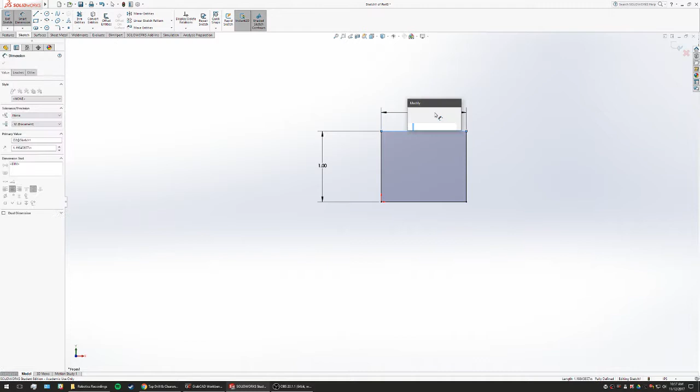click on the edge you want to dimension, click somewhere else, and then I want to do a 1-inch cube. Alright, and then now I've dimensioned one side. I'm going to go back to the features. I want to extrude the base. And then this number right here is how deep it extends.

And so I want to extend it 1 inch, and I just want to go blind, and I want to go off of the sketch plane that I started on. And then you have a 1-inch cube. Then you can type in cube, save it as that. I already have one, already made this. Alright, now let's make a cube.

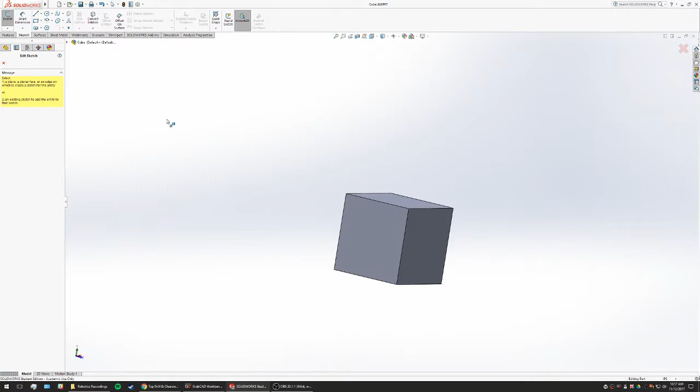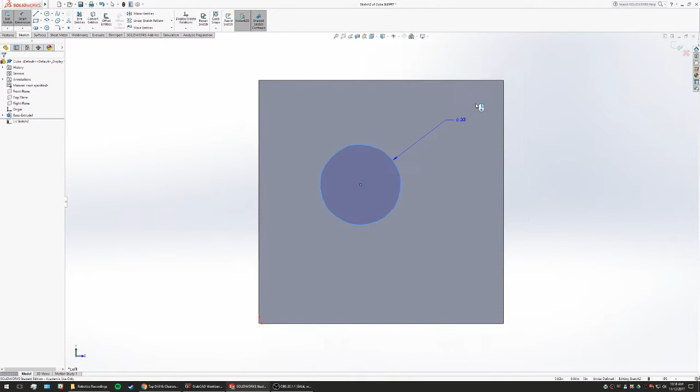If you want to keep going, you can click sketch, you can click on a face, and so now I can draw a hole or something, and I draw on that face. And if I want to view that face head on, hold Control, tap the number 8, and it'll reference to that face and give you a nice view. And I want to dimension that hole. Let's make it a 1/4 inch hole, so 0.25.

You can also do math. Whoops. You can do 1 divided by 4, and then it'll automatically solve it for you. Now there's a few ways you could dimension this to the center of this cube. So the first way is click the center of the cube, the center point, and an edge. And if you want to put it in the very middle, you go 0.5 and 0.5 that way. Now it's in the very middle.

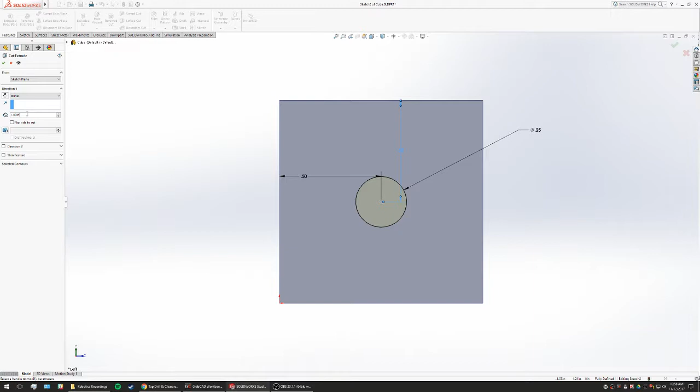And you can do extruded cut under the features tab. And then there's a whole bunch of options. So blind, you set the distance you want it to extrude. And so it is default to 1, so it'll go all the way through. What I'd prefer to do is through all.

And through all just goes to the next side. You could do up to next, and up to next will stop there. So if you have more material over here, it'll stop at that point. We're just going to go through all. And then now you have a hole right in the dead center.

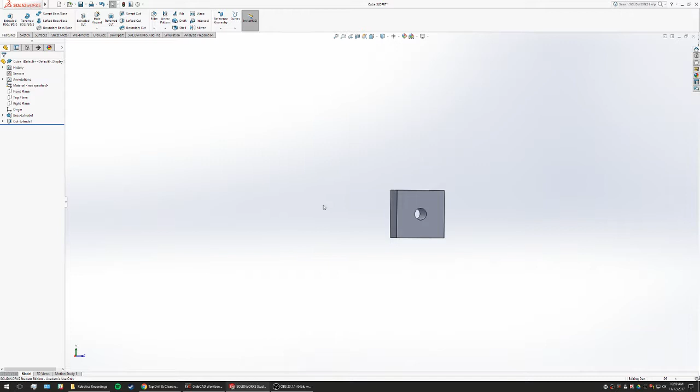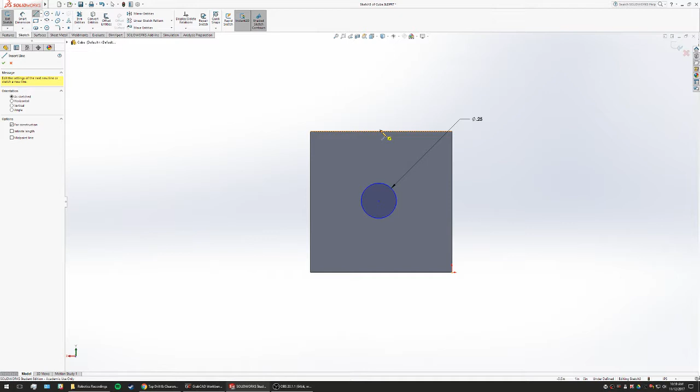Now, if I wanted to dimension the hole a different way, I would do it on a different face. So this one. Create my hole. 1/4 inch hole. Now, I'm going to do a line. I want it to be a construction line, which means that it's not a physical entity on the sketch. It's just so that way I know where things are.

You'll see it's a dotted line, which means it's not really there. So it's like an imaginary line. I'm going to create 2 of them. Now, let's see. If you start your line by hovering over that edge, it gets orange and it's dotted. That means that you're going to start your line, and the little symbol down to the bottom right means that it's going to be coincident with that edge.

And if you click right here in the middle where that square is, it's going to be the midpoint. And then I want it to be a vertical line with the midpoint, and this is a construction line. And then now, if you wanted to center this hole, you'd highlight this center dot, click on the midpoint of one of those lines, hit coincident, and it's centered in the middle of the block.

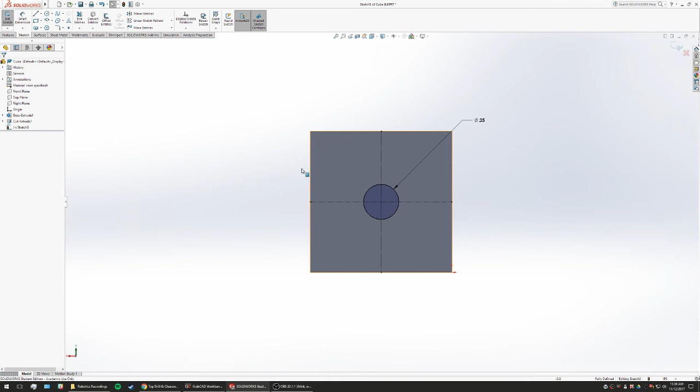Now you want to stay in the sketch and do a cut and through all, and now you have 2 holes through a block.